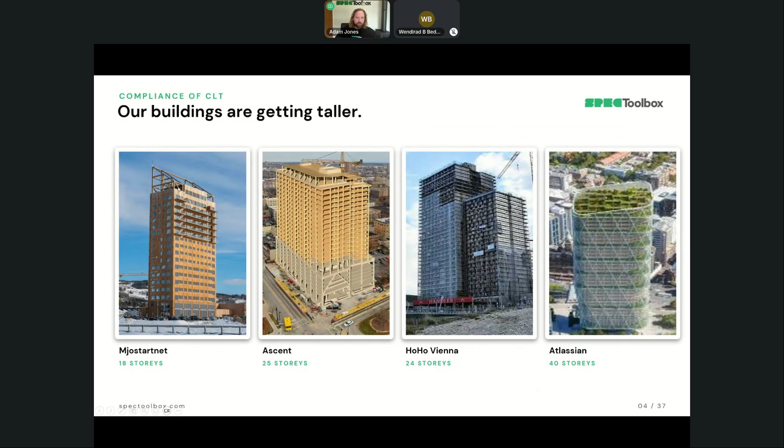But intuitively, we know that fire and timber burn. So it's the question mark that everyone probably watching Atlassian Tower goes up, why are we putting logs that I'd put on a fire into a building, basically? But questions well asked, but also well answered.

But there's something else that happened a little while ago, and this has got nothing to do with timber, but it did spook everyone when it comes down to combustible materials and compliance. So Grenfell, it's a famous building that went up in smoke. 72 people died. The issue here was combustible cladding, not timber, and also no fire sprinklers. So without sprinklers, there's nothing to suppress the fire as well. So a lot of these things are adjacent to the timber solution and the things that actually stop the fire.

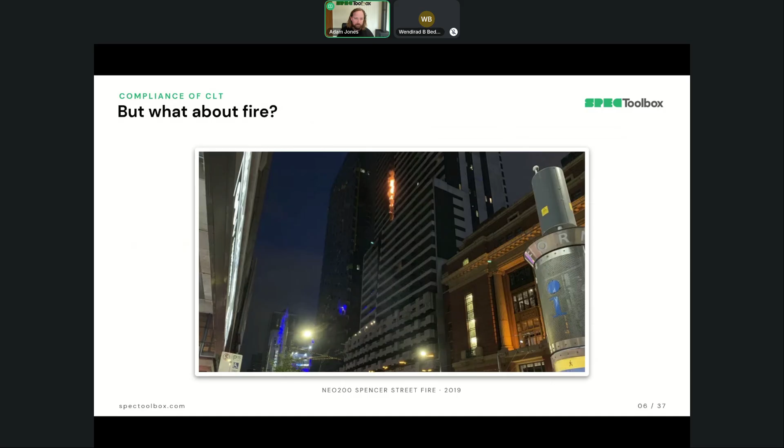And going ahead, a bit closer to home, we also had Spencer Street fire. So again, combustible cladding was an issue, and we got everyone a little bit spooked. And it's one of those things when there's a lot of uncertainty involved and you don't know the topic very well, naturally you go towards risk aversion. And I think timber got the brunt of that, particularly in the UK where the market got hurt.

So understanding compliance is really critical here and knowing how to navigate things. And the first thing when it comes to compliance, this is the same across all codes essentially: what are the goals that you're trying to achieve and the functional objectives? And then how are the performance requirements achieved? Then underneath that, as I'll take you through, there's multiple pathways to achieve it. So firstly, it's life safety, firefighting, prevention or intervention. They're the key things, but then also business interruption and controlling property loss and the amount of costs as well, to make sure that buildings can get insured at the end of the day.

So when it comes to timber buildings, there was great work put together by Forest Wood Products Australia and individually Boris Iskra. He did a lot towards this essentially and really took the industry forward to give us confidence on this. And what it meant was there was a clause entered in the building code that you can use - so even if the building code says it needs to be non-combustible, you can still use fire-protected timber, meaning you're allowed to use timber even though it's a combustible product essentially, as long as the building's not 25 meters in height, which is about 8 stories.

You've got a sprinkler system, and the research shows that sprinklers pretty much do a lot of the heavy lifting. There's research in Canada to show that it doesn't matter what material the building is - if you've got sprinklers, you're pretty much totally fine. But also it needs to be non-combustible as well, and then cavity barriers and things like this. So great, it's in the building code.

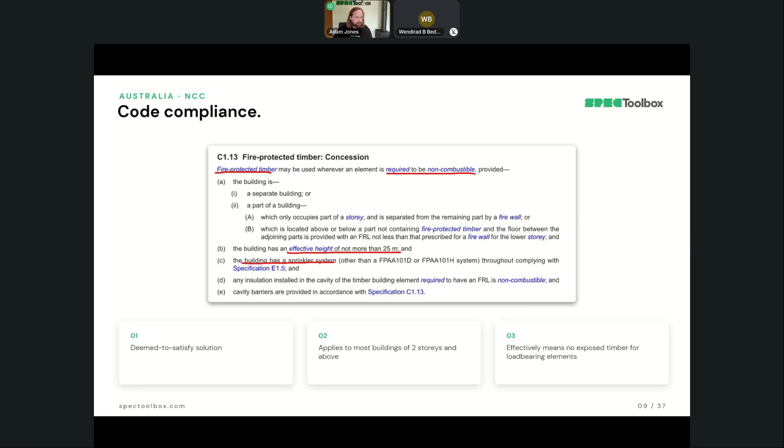So a closer look at the building code - there's essentially performance requirements. So what are the objectives that you're trying to achieve? And then there's 2 compliance pathway solutions. So one essentially is the performance solution and the other is the DTS.

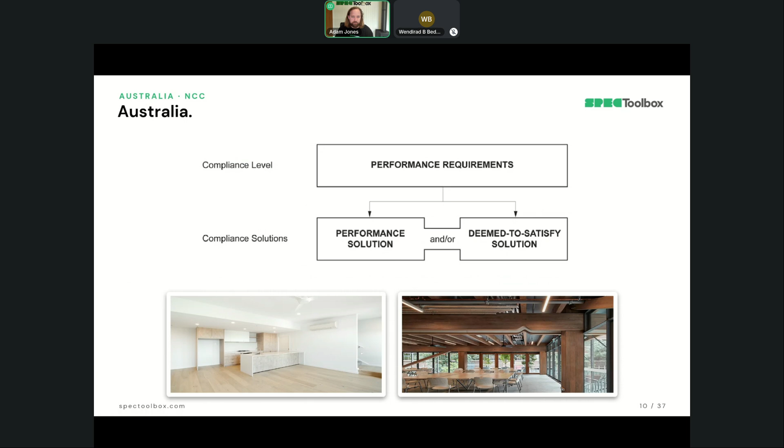So the deemed to satisfy is a bit much like getting a cookbook, going into Marley Spoon, following a recipe. If you follow that, you're going to have a beautiful dinner because a chef has put it together. And if you follow their steps, you're great. But the other one is you can hire your own chef to cook the meal as well. And that's essentially a performance solution - achieving the objectives of a nice, tasty, nutritious meal at the end of the day. So that's essentially one way of looking at it.

So if you look at the overall functional objectives, these are the performance requirements in the building code. You've essentially got these provisions here that at the end of the day is all about fire resistance and stability, compartmentalization and openings and protections. This is where it says, I don't care how you achieve it, as long as these things are met. And then underneath that, you've got the DTS or the performance solution as well.

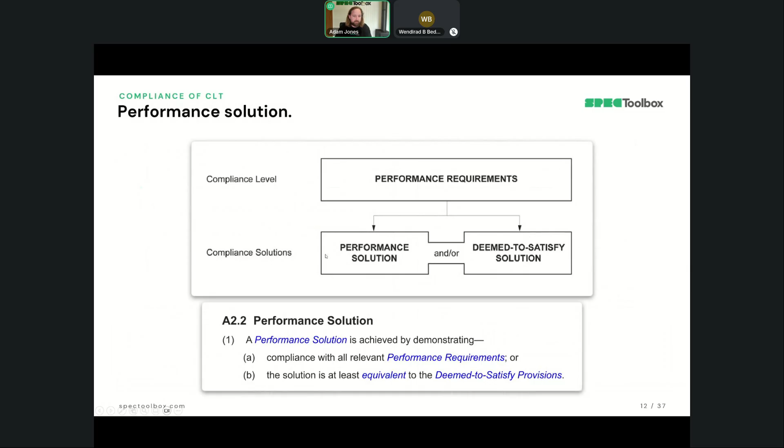The performance solution is a pathway to achieve these performance requirements. A lot of today we're going to be focusing on the DTS from an FRL perspective, but sometimes it's unavoidable when you go to exposed timber - the performance solution from structural fire design becomes critical.

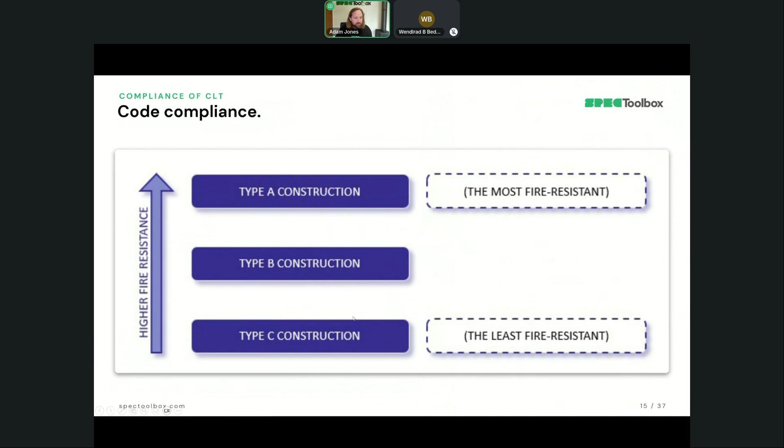So a few questions: can I expose the timber, and what is the FRL of the mass timber product? Before we get into that, it's good to know the different classes or types of buildings. As you require higher fire resistance and building risk increases - whether it's the height of the building or the building type - you need type A construction, which determines whether you can expose it and what the FRL is. Through to type C construction, which is pretty much like a residential building, very low risk - expose your timber, no problem, she'll be sweet.

When it comes to an FRL, there's a few different things - these lines denoted by FRL. Firstly you've got structural performance, integrity, and insulation. Adequacy is structural performance - one of the objectives required for the building code - does it stand to meet the amount of time required? Integrity is whether you're actually passing through fire and hot gases. And third is insulation - is it heating up beyond what's satisfactory?

If you look at the different building elements, it's pretty self-explanatory that a column, you only care about adequacy - you're not separating anything. But if you go load-bearing wall, it's adequacy, integrity, and insulation.

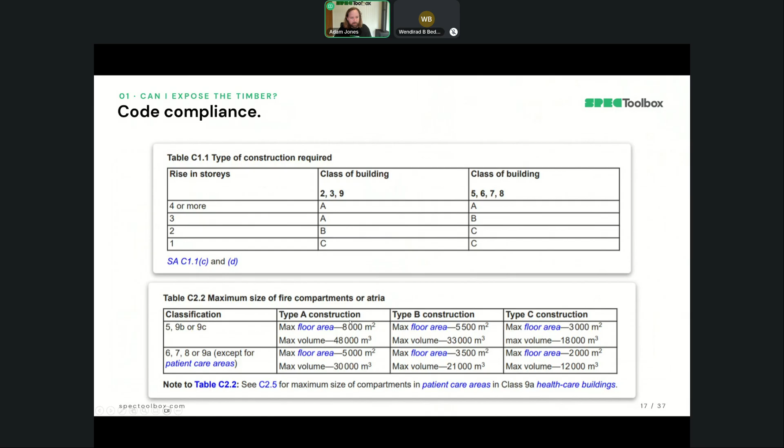In the building code there's different classes of buildings, essentially by the class - could be class 5 office buildings, or 2 or 3 which is residential. I'm a bit rusty on my memory there, or the maximum size of buildings as well. So if you've got a tiny industrial building, no problem. A big industrial building, you need type A construction.

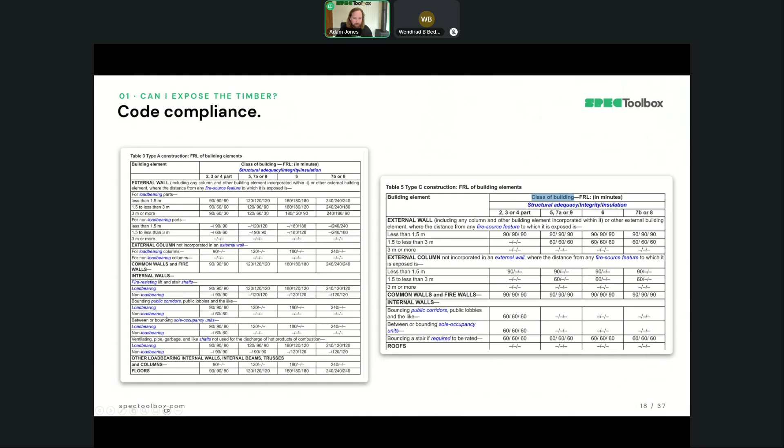Once you know the type of building, you can actually look at the individual elements - external walls, columns, whatever it might be - to determine what the FRL of the individual element is. Then the next question: can I expose the timber?

The building code says in a building that is type A or B, where it needs to be non-combustible, you actually need it designated non-combustible. I'm not going into detail right now, but it's essentially plasterboard or other products that can be classified equivalent by an accredited testing laboratory. But essentially it says external walls, common walls, and load bearing internal walls need to be non-combustible - that's where it delineates that. It says no matter what, you need to be non-combustible.

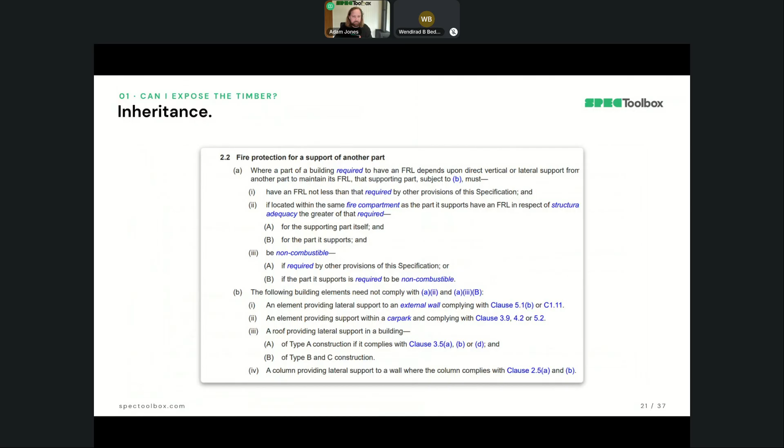But what about floors and everything like that? That's actually not covered in C1.9, but it is here. It says anything that touches those external walls is deemed inherent, and it needs to inherit the same FRL. That's essentially where a lot of the building elements end up needing an FRL. But if you go through the letter of the code, it's pretty funny.

Now, what I'm going to tell you now, I don't think it is the intent of the building code, but if you look at a building like this, 25 King Street, part of you might say, yep, of course it's a performance solution - everything needs to be covered up in plasterboard to be DTS. But if you actually follow it, there's a funny loophole here where this could be a DTS building. Again, don't quote me on this and sue me or anything like that.

Essentially, as it says in the building code, external walls need to be non-combustible. There's no external walls here. Then it says all the floors inherit that as well, essentially. So class C, it's not this building. Class A and B, there's no load-bearing internal walls either, but the external wall needs an FRL as well. So if the external wall needed an FRL, the rest of the building inherits that.

But then it also says that if you get wall wetting sprinklers, you don't need that to be non-combustible. So that eliminates the external wall, then anything that inherits that - all of a sudden you've got a fully exposed DTS building. Probably won't fly because it's not the intent of the building code.

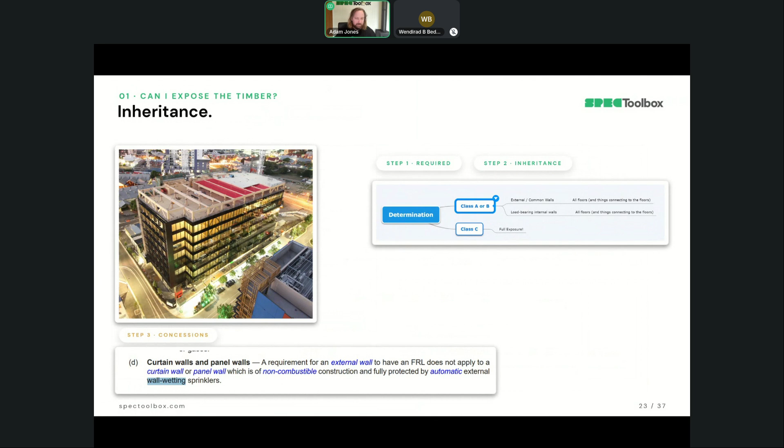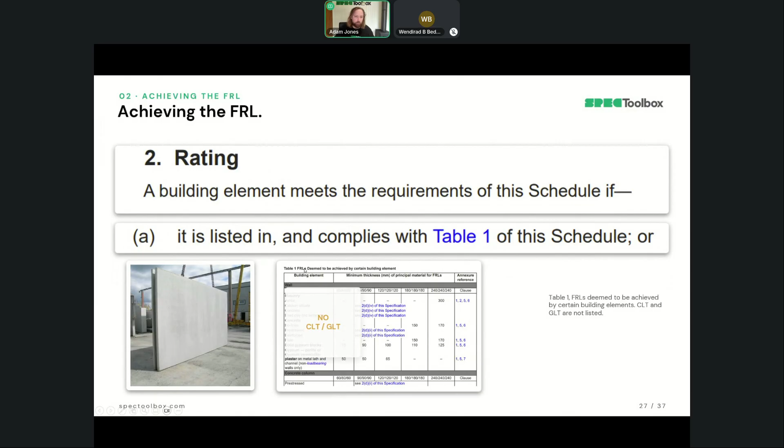But again, it's worth knowing how it all works. The second question is how do you achieve the FRL? This is where you go to Schedule 5 in the building code. There are different pathways. One pathway is essentially Table 1.

It tells you that concrete of certain thicknesses can meet the FRL. There's no CLT or glue lam there. Secondly, if you could do a standard fire test by an accredited testing laboratory, like a NATA accredited lab, essentially Jensen Hughes or CSIRO, anything like that, and they say it achieves the FRL based on a fire test, then you're sweet.

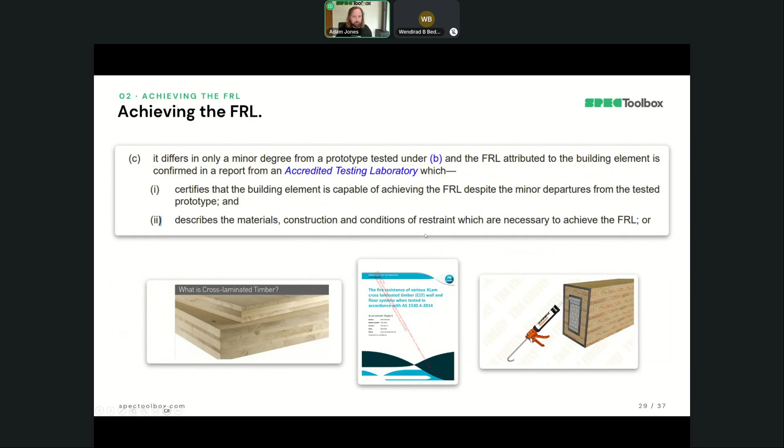C, another one is if it's a minor deviation, but basically the accredited lab is making that call, and it's all sweet. Then D, in AS1720 Part 4, if it's listed in here, you can achieve the FRL. That means things like glue lam, as long as it achieves this manufacturing grade, then you're totally fine. But also structural adhesives.

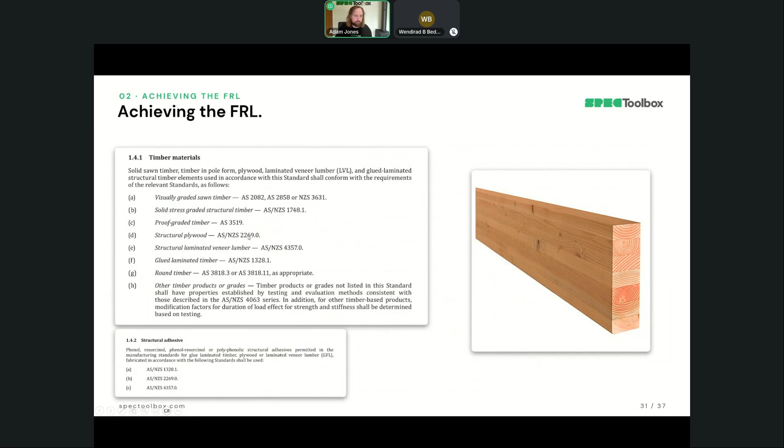You've got to check if the supplier's got certification of whatever the adhesive is. But if that's the case, then you can follow char rate provisions in AS1720 Part 4, and then you actually meet the FRL.

E, standard fire test confirmed in a report as well. This is sort of where it explodes and opens up, and there's a lot more interpretation here, essentially where you don't need the lab, but you need suitable evidence to do the job.

So if you look at different things, you can imagine you've got a CLT slab, AS1530 Part 4 test to get a DTS. The CLT suppliers now give you char rates to do that, and there's good reason for it. CLT penetration to services, AS1530 Part 4.

For the beam, you might get AS1720 Part 4, and same with the column as well. Then the joints and connections, you also need some testing of the product as well, or equivalent, to make sure you're achieving that. So with that said, that's a little bit about CLT fire design and broader fire design and compliance.

And with that said, now Wendrad, my friend, I'm going to pass over to you. And then at the end, we'll take some questions.

Thank you, Adam, for passing it over.

Okay, so hi everyone, thank you for joining. My name is Wendrad Bedane. I'm a structural engineer at SPEC Toolbox, Addis Ababa. Today we'll talk about CLT fire design using the new Eurocode 5, and I will show you how to use SPEC Toolbox to do this calculation in a live demonstration.

In today's session we'll cover four things: fire mechanics, where we see how fire actually works; then timber in fire, where we'll see how timber performs when exposed to fire; third, we'll cover the latest Eurocode 5 updates; and finally, we're going to have a live app demonstration for a selected project.

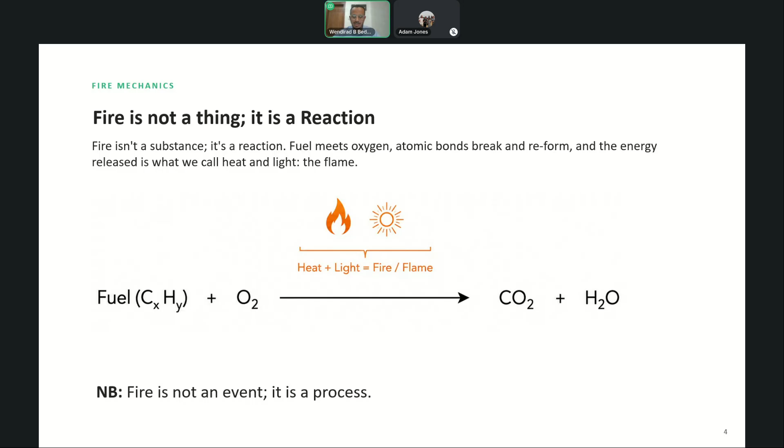One thing we need to take into consideration is fire is not an event, it's more of a process. So in the next slides, we will see the major phases of the fire development process.

So the first stage of the fire development process is the incipient stage. Here we don't see any flame, it's more or less a smoldering combustion reaction, and the temperature ranges between 0 to 200 degrees centigrade. With enough supply of fuel, we will proceed to the next fire growth stage, which we call the growth stage.

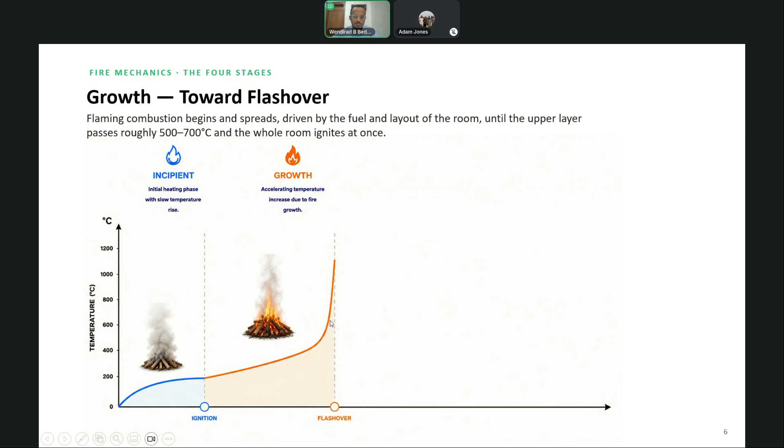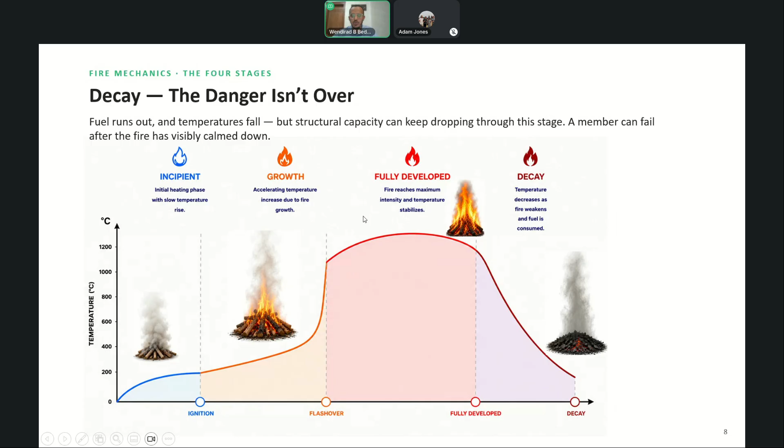Here temperature decreases and the fire weakens, and finally the fuel is consumed, and this stage is controlled by the fuel supply. These are the major fire development stages that we need to consider while designing members for fire. The other thing we need to discuss under fire mechanics is the fire severity.

This is a measure of how destructive a fire is to the structure. It's measured in terms of the fire's duration, and compared with the fire resistance. So whether our structure sustains this fire or not will depend on the comparison of the fire severity with the resistance provided, and we decide whether the structure passes the verification or not.

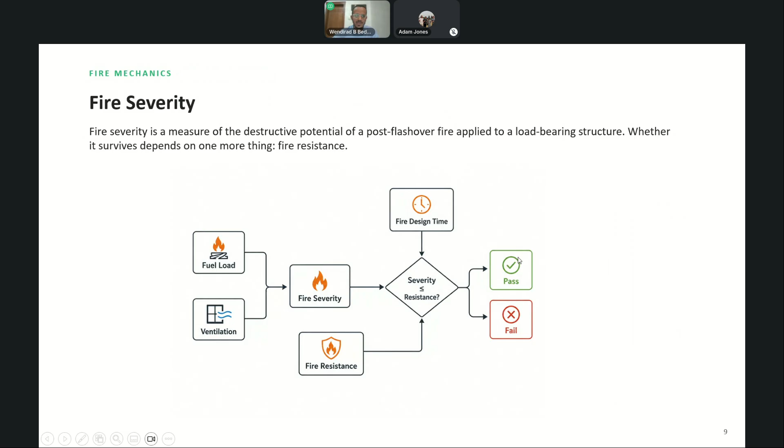So now it's all about timber in fire. In this section, we'll see that timber is a fuel and at the same time the structure itself. Unlike steel and concrete, where we don't see burning of the structure, timber is genuinely burned. It's part of the fire that we need to protect, and at the same time it is a fuel that contributes to the fire development. So this is critical while designing structures to fire, particularly made of timber material.

At a micro level, we see the following chemical reactions on timber. When the temperature ranges between 0 to 100 degrees centigrade, we'll see a drying reaction where moisture leaves from the timber and the timber starts to dry and gets intact. Then around 150 degrees centigrade, there is initial decomposition. Here, irreversible reaction starts. Then we go to the pyrolysis reaction.

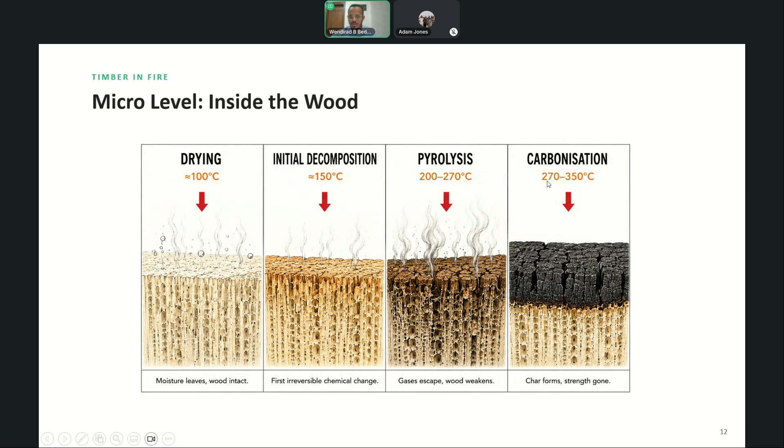Here, gases start to escape. At this stage, the strength and the stiffness are highly compromised. And finally we will end up with the charred or carbonisation chemical reaction between 270 to 350 degrees centigrade. Here, all the strength and the stiffness are gone.

At a macro level, timber can be classified into three different layers. One is the char layer between 500 to 700 degrees centigrade. Then comes the pyrolysis zone, which is the heat affected zone, but the timber is not yet charred. And the other is the unburned wood. Anything below an average of 200 degrees centigrade, full strength and stiffness are retained.

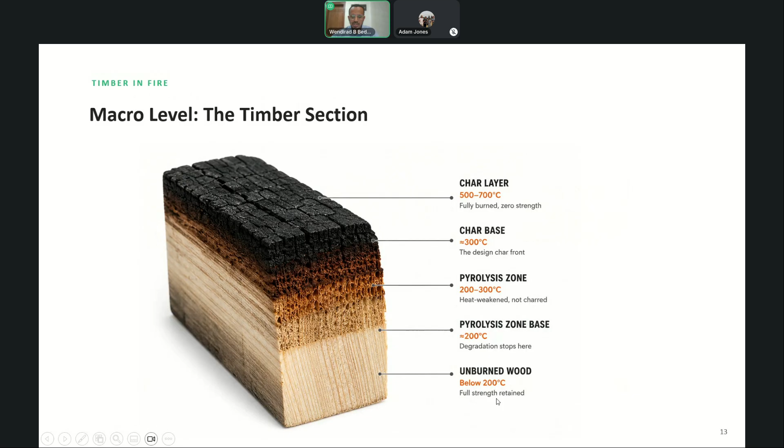The key and critical parameter we need to consider while designing timber members for fire is the charring rate. This parameter measures how the fire chars the timber, so it's more or less the rate of charring. This parameter depends on the species and density of the timber. Denser and heavier species will char slower, higher moisture content will slow the charring rate, and corners will char faster than the normal flat soffit of the timber member.

Generally, we will follow the following charring rates for softwood. It's 0.65 millimeter per minute, and we will have different charring rates for different species of woods.

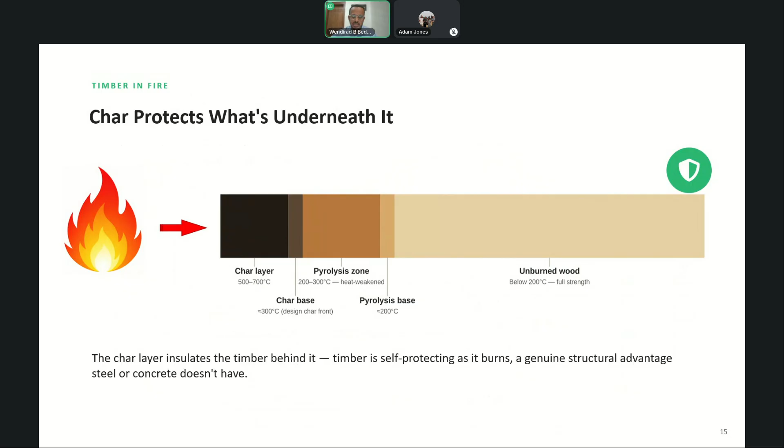This is the most interesting part while we discuss the charring of timber. The charred layer starts to insulate the unburned section when it is exposed to fire. So this self-insulating property of the timber needs to be considered in our design. This advantage we don't get from conventional steel and concrete buildings. So while we design for timber in fire, we need to consider the self-insulating effect on our design.

The other thing we need to consider while designing CLT is the glue line integrity. CLT is not solid wood, it's more layered together by glue. There are different adhesive types used to glue each lamella. One is the fire resistance adhesive type, where the adhesive or bonding agent is good enough to resist the fire, and it will stick all the lamellas together even after burning, whereas the thermoplastic adhesive types will fail to hold each layer when exposed to fire.

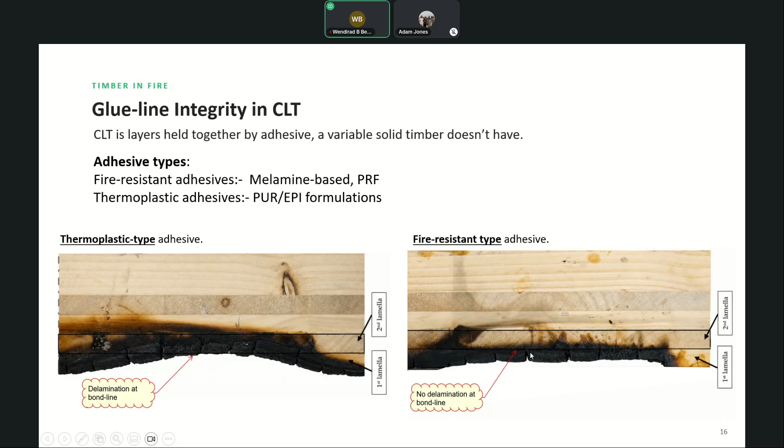As you can see on the screen, the left side is the thermoplastic type, and when it reaches around the glue line or bond line, it starts to delaminate or fall off from the unburned section. Here, since the fire adhesive type is fire resistant, it starts to stick to what is below or what's already charred.

Then we'll come to the heat affected zone. As you know, when timber is exposed to fire, the strength and stiffness are compromised. Obviously the charred part has no stiffness and strength, but the heat affected zone is the section where we have reduced strength and stiffness. For the uncharred section, we consider the strength and stiffness fully retained. So this we need to consider while we design our structure.

Now we will go to section 3, where we design timber for fire using the latest Eurocode 5. As discussed by Adam on the design goals, the latest Eurocode provides three approaches to make sure our timber structure is safe during fire design situations: the acceptable solution, the approved calculation method, and the performance-based alternative design solution. We'll see this in detail, as covered in the latest Eurocode 5 under chapters 6, 7, and 8 respectively.

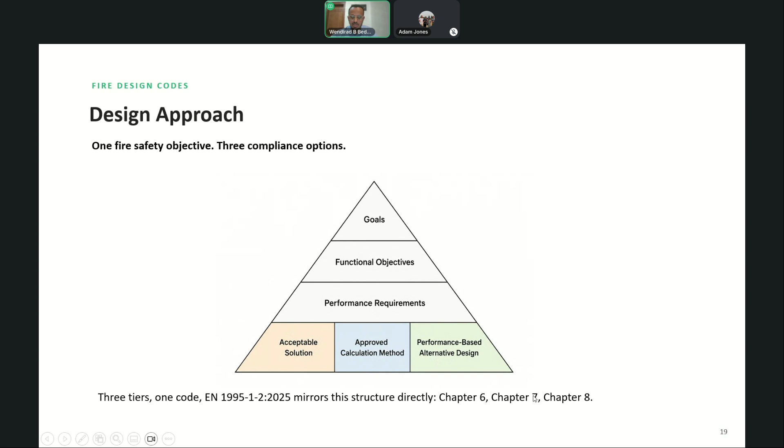The first solution is the acceptable solution. Here we don't do any detailed calculation, everything is already provided by the code. We want to make sure our standard simply fits what is listed on the tabular data of the code, and no engineering judgment is required. No charring calculation needs to be done. So this is the fastest path when we need to comply with the fire design code. If your building matches, you can use the table provided under chapter 6 for tabulated design data.

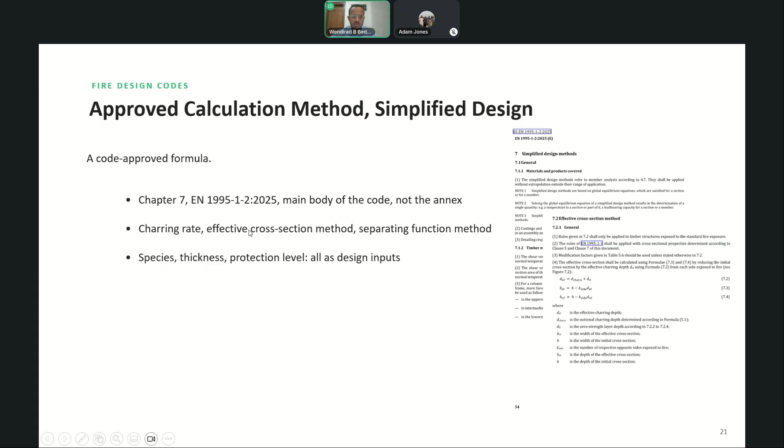The next solution is the approved calculation method. Here we use approved calculation formulas, so there are detailed calculation methods. This is the main body of the code, not provided in the annex. You'll see the charring rates, different fire design methods including the effective cross-section method and the separating function method. We'll also cover how the timber species, thickness, and protection level affect the design process. Our calculator, SPEC Toolbox, operates on this method for the moment.

The other design solution is the performance-based design solution. Here, the fire engineer starts to develop advanced calculations based on the first principles of the design goals. Thermal and mechanical modeling is required, and you can do it with finite element analysis. The detailed provision is presented in the annex section of the latest Eurocode, and most importantly, this requires a fire specialist to do the performance-based design approach.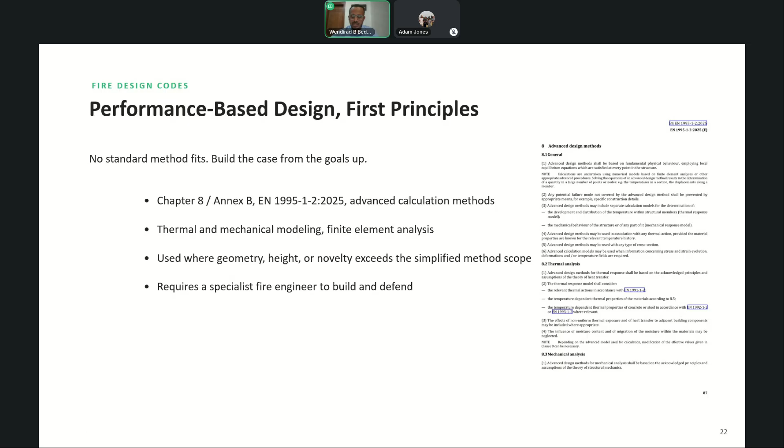Now we will see the components of fire resistance. This is more or less similar across all standards and codes. There are three fire compliance or resistance requirements. The first is structural adequacy. Here we make sure that the load-bearing capacity is retained during the fire exposure time, measured in fire exposure time. R stands for the fire resistance level of structural adequacy. The standard fire exposure times are 30, 60, 90, and 120 minutes. So we will make sure that the structure will not collapse during these fire exposure times.

The next is integrity. Here we only make sure that the passage of hot flames and smoke to the unexposed side is prevented, so that it is convenient for the user to use the fire unexposed side during fire attacks. This is also measured in time, including 30, 60, and 90 minutes for the standard fire exposure.

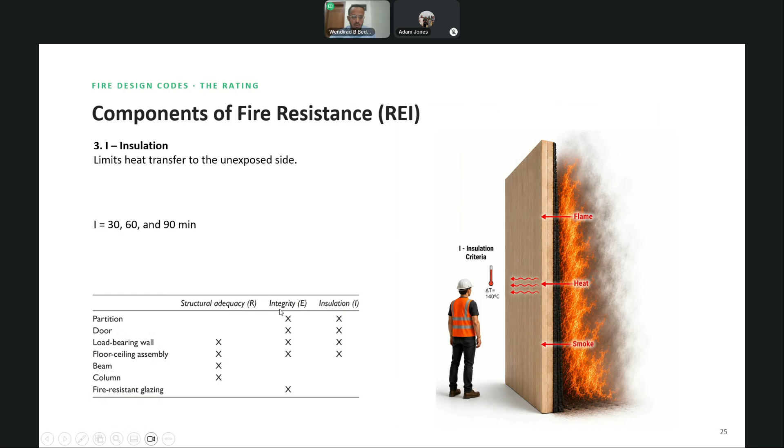The other fire resistance component is insulation. Here we limit the temperature on the unexposed side, so the user feels comfortable when using the unexposed side of that structure. This is also measured with time duration. We will see this in detail in our calculation. These are the typical requirements: load-bearing wall and floor assemblies are expected to satisfy all the compliance requirements of structural adequacy, integrity, and insulation, whereas partition doors and glazings might require only one or two of the requirements for fire resistance.

In the latest code, two charring rates are provided. The basic charring rate is a fixed number, depending only on the species type of the wood. The notional charring rate is the factored charring rate based on different factors, including the gap factor at a joint and the protection factor, depending on the provided protection type. These are the typical charring rates according to the code, so we will pick what fits for our selected timber species.

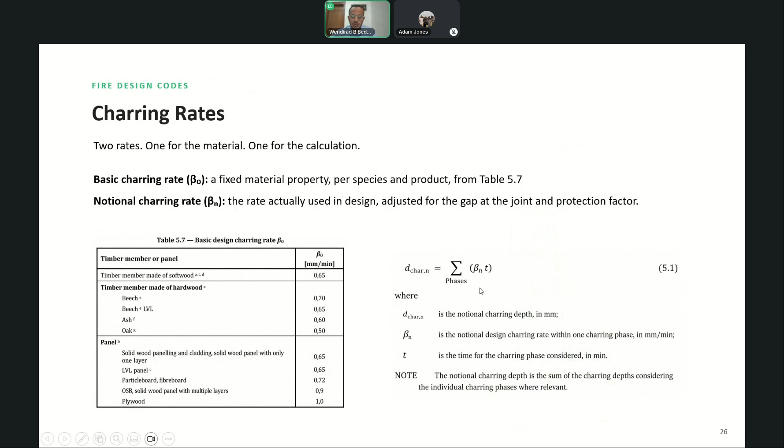Then we will calculate the char depths for different phases using the following formula. We'll see the detailed phases that we need to follow while using the latest Eurocode charring model.

So there are different phases, including phase 1, 2, 3, 4. The charring rates can be calculated with the following formula. Beta naught is the basic charring rate, Kg is the gap factor, and K2 is the protection factor. Depending on the phase, the formula will vary as shown here. This typically applies for plane members, including CLT ceilings and CLT floors.

In our calculation, then comes the charring phases for the European char model. On the latest code, the char model classifies the charring framework into two major classes: one is when the timber is initially unprotected, and the other is when the timber is initially protected. When initially unprotected, the charring rate follows phase 1, where we don't have protection.

For the initially protected cases, we have four charring phases, including the encapsulated phase. Here, no charring occurs at this stage, so phase 0 is denoted with no charring. Phase 2 is protected charring, where we see charring of the timber behind the protection - the protection has not failed, but charring has already started. Then comes post-protected charring.

This is the charring stage when the protection system fails, and the charring starts to speed up with a faster rate. Then comes the consolidated charring phase. This typically applies for a thickness that extends above 25 millimeters, where the charring rate will start to slow down - this is the self-insulating behavior of timber we discussed.

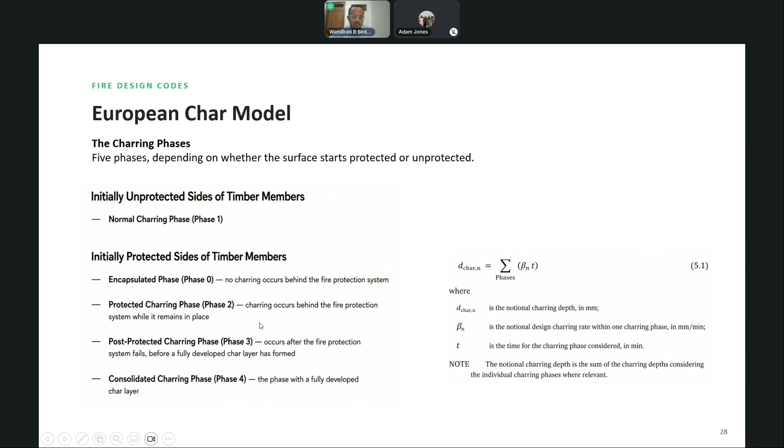These are the major times that we need to consider in our charring calculation. The first is the starting time of charring, which denotes where charring begins. If you have protection, the starting time of charring will be delayed, and we calculate it with the following formula depending on the protection type used for the floor or wall buildup.

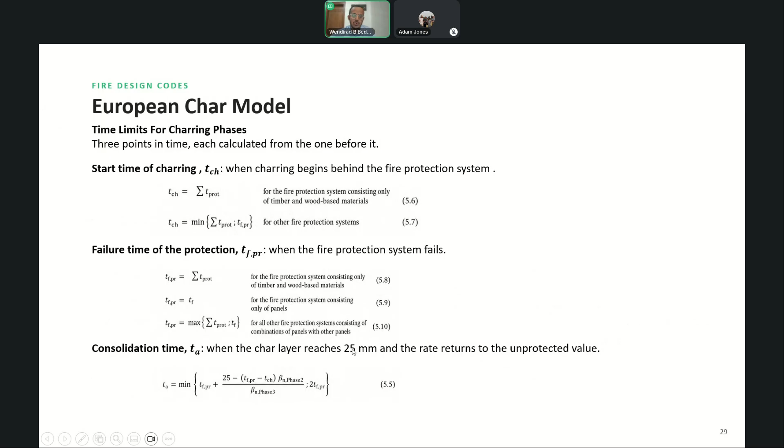The other is the failure time of the protection. Sometimes charring starts behind the protection before the protection fails, so we need to calculate at what time the protection will fail, and also the consolidation time. This corresponds to the charred depth of 25 millimeters, so we calculate at what time the charring depth reaches 25 millimeters. These are the critical times we need to consider when calculating for timber in fire.

The other is the zero strength layer. This is a critical one. As timber is exposed to fire, a portion of the timber will not be fully charred, but it is affected by the heat. So we need to deduct from the uncharred thickness, and this thickness is dependent on the char line, or where the fire stops.

If it is the first layer, we use this row, and if it is on the other layers, we use the second one. It also depends on whether this is for the floor, whether it is the tension or compression side of the floor, and whether it is initially protected or not. So we will follow this table for the floor. Likewise, for the wall member, we will follow the following zero strength calculation formulas. These are totally new, as compared with the current Eurocode 5 for fire design.

So the following four slides will show us how timber chars based on the European model. Depending on whether the bond line holds the charred layer or not, we have a different framework. This is for when bond line integrity is maintained. If the member is initially not protected, we will use the charring model shown on the left side.

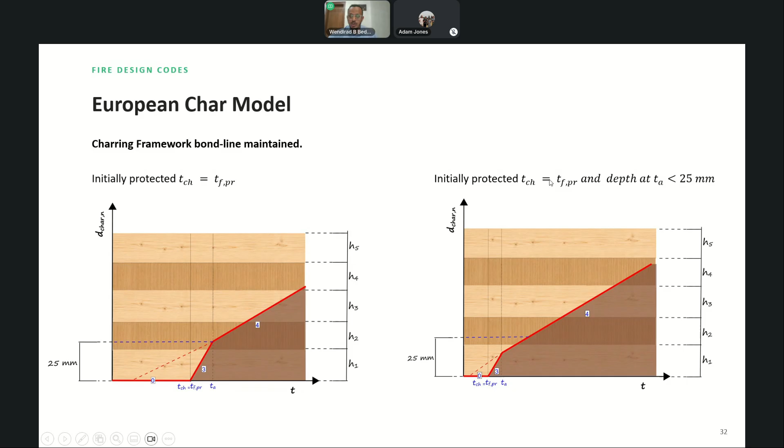If the starting time of charring and the failure time of the protection are also equal, and also the depth at the consolidation time is less than 25 millimeters, we use this plot for our calculation. The same applies when the glue line is not maintained - that means if the bond adhesive will not support a higher temperature, we will follow the following detailed framework.

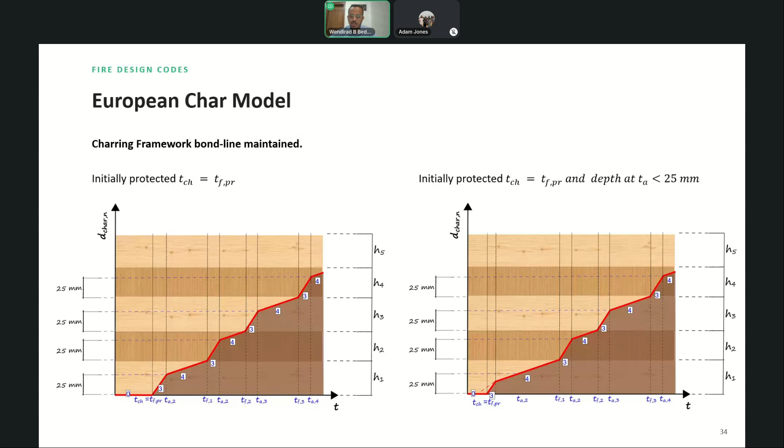This is for initially unprotected, and this is for initially protected, but where the starting time of charring and the failure protection times are not equal. The same is true for initially protected cases where timber charring time and failure protection time are equal, and when the consolidation time is at a depth less than 25 millimeters. So we need to strictly follow these charring frameworks while using the European char model to calculate the char depths.

Now we will see a little about the design method provided in the latest code. In the simplified design method, we calculate the remaining unburned thickness of the timber using the following formula. D effective calculates the effective charred depth, and H effective is the unburned or remaining section after the fire.

This plot and dimension applies for one-dimensional charring, used when designing a plane member including floor and wall. This other one applies for two-dimensional charring, used when designing timber beams and columns for fire structure design.

The other is the separating function method. Under this method, we check that the integrity and insulation criteria are met, since fire can have different heat flow paths. The red dotted line shows the different fire or heat paths. We calculate each and select the critical one, and for our design we use the envelope of all possible heat flux paths.

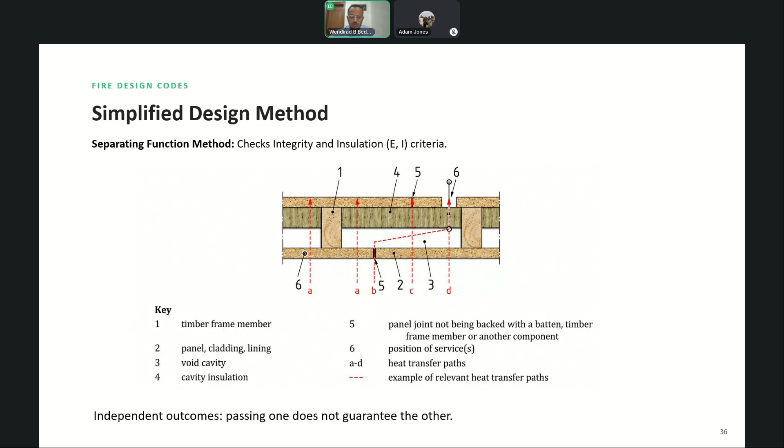This is critical when we select our floor build-up or wall build-up for fire design using the latest Eurocode 5. The other topic we need to discuss is the protection time.

Here we calculate the individual layer protection on our build-up. To calculate this, we need to account for the following parameters. First is the basic protection time - the code provides generic formulas for the default protection types. There are also exposure factors for the exposed side, and an unexposed side factor, which will affect or factor the basic protection time.

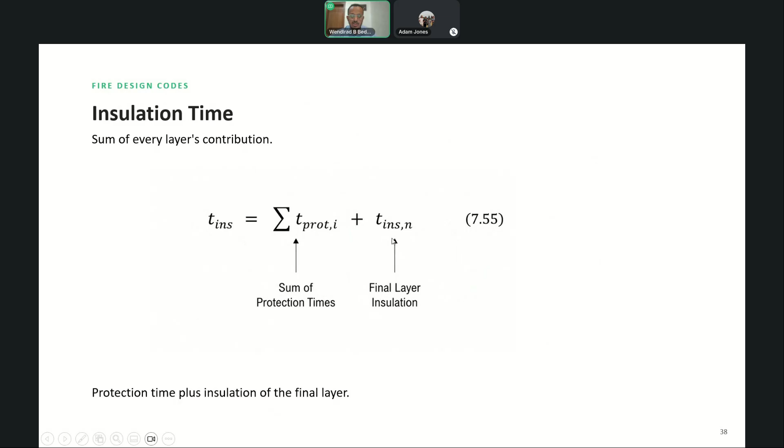Then we have a correction time, or additional time, and also the joint factor that we need to consider. With all this formula and calculation, we decide the protection time of a single layer on our floor or wall build-up. Likewise, for the insulation time calculation, we use the sum of the individual protection times plus the final layer insulation time.

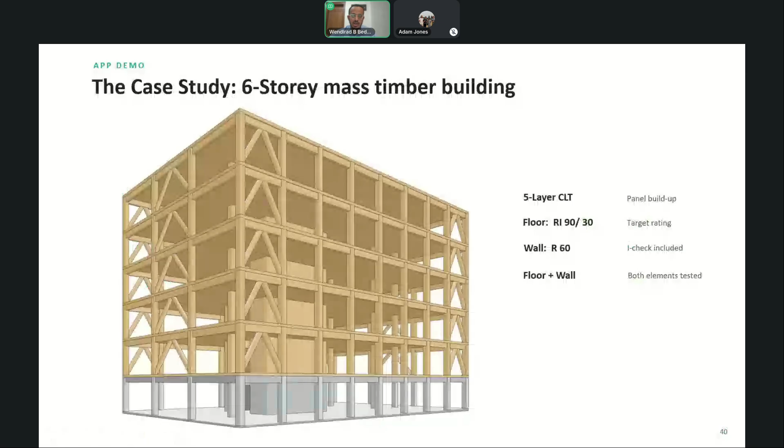With this, now we will proceed to the app demo. Before that, I will brief you on the project. This is a 6-story mass timber building that we will use for our design. It's located in Brisbane, Queensland.

We will use the design standard AS 1720.4. For the structural system, it considers the CLT floor, CLT wall, CLT beam, GLT beam and GLT braces, and also GLT columns. For the fire design, we will use the simplified design method, following the SPEC Toolbox calculator.

This is the typical floor of this building. We'll have a load spanning in the X direction, or the lateral direction. The support is the beams, and around the core, the support will be the wall marked by the red color fill.

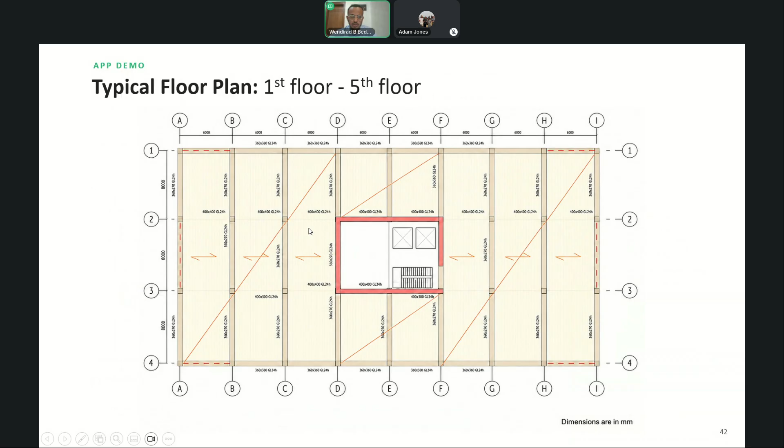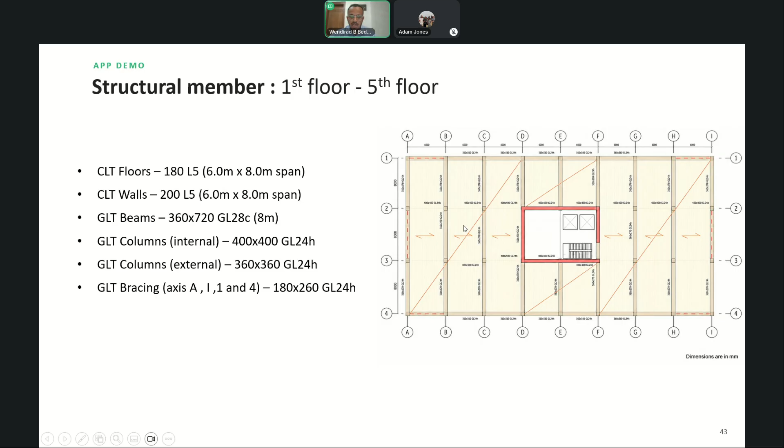So we will design a selected member. For the structural system, our floor is 180 millimeter thickness, 6 meter by 8 meter span. The same for the wall, and the GLT beams are with the following dimensions, and we have bracing at axis A, I, and at axis 1 and 4.

With this, we'll start to calculate the loading on the floor. We selected a one strip span for the analysis, and as you can see highlighted here, a 1 meter strip width is used. The selected CLT type is CLT KLH with 5 layers and 180 millimeter thickness.

The superimposed dead load is 2.75 kilonewton per meter square, and the live load is 3 kilonewton per meter square. For this section, we will try to verify the structural adequacy, or load bearing resistance, for 90-minute fire exposure, and insulation for 30-minute fire exposure.

So we have two options for the floor, first floor up to fifth floor build-up. The first build-up has 5-layer CLT followed by wood fiber insulation and a gypsum plaster board of 30 millimeter thickness, with the wood fiber at 50 millimeter. The second option is protected from underside with 2 layers of gypsum plaster board, still with a 50 millimeter wood fiber insulation between the CLT and the gypsum.

So the first option is economical - we will see whether it satisfies our design - and the second option is an enhanced protection system. Now let's proceed to the SPEC Toolbox app.

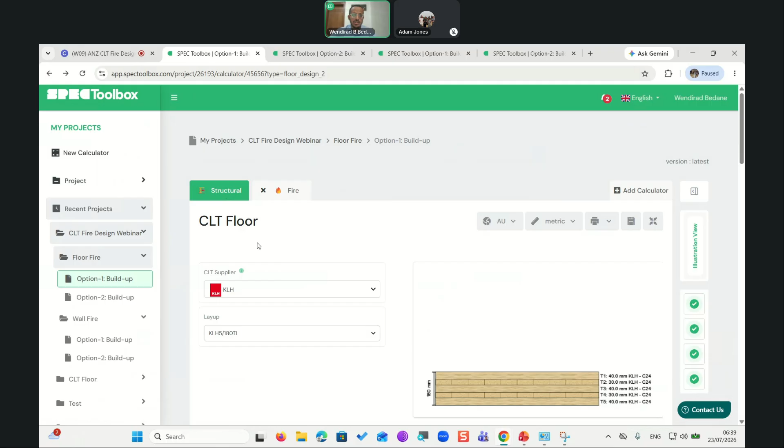I have already built the calculator, so we can follow along to save time.

The first thing we need to define is the region, so I set the region to Australia. We will define the build-up: the supplier is KLH with a 5-layer, 180 millimeter thick CLT floor. Then we set the design code and the analytical method, which is the extended gamma method. If you'd like detailed information, click this blue button.

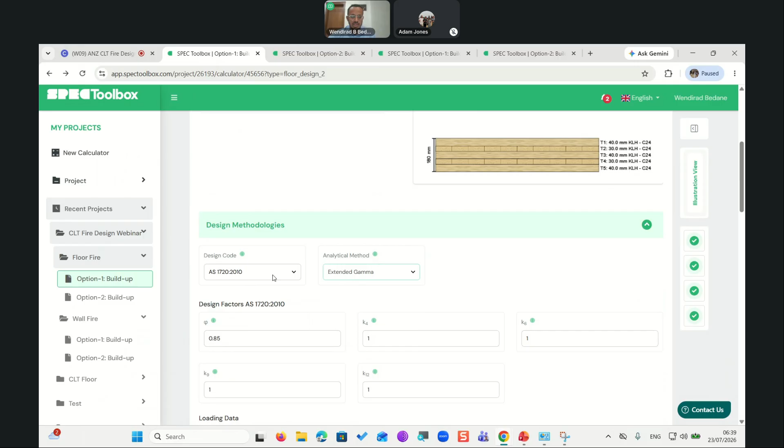You can have detailed information about the input you are going to define. Here we have the design factor for the Australian code.

Then comes the loading data. We want to calculate the loading combination using the default load combination as per the following loading code, and we will set all live load factors and also the creep factor.

This is important because we need to define all necessary input for the ambient section before we proceed to the fire calculator. Then comes the analysis section.

As we have seen in the presentation, it's a 3-span with 6 meters each, and the assigned load includes a live load of 3 kilonewton per meter square, which we define here. The dead load is 2.75 kilonewton - this is superimposed dead load, and the calculator will do the self-weight calculation automatically.

So we set it to yes. If you don't want to include the self-weight calculation, you can set this to no.

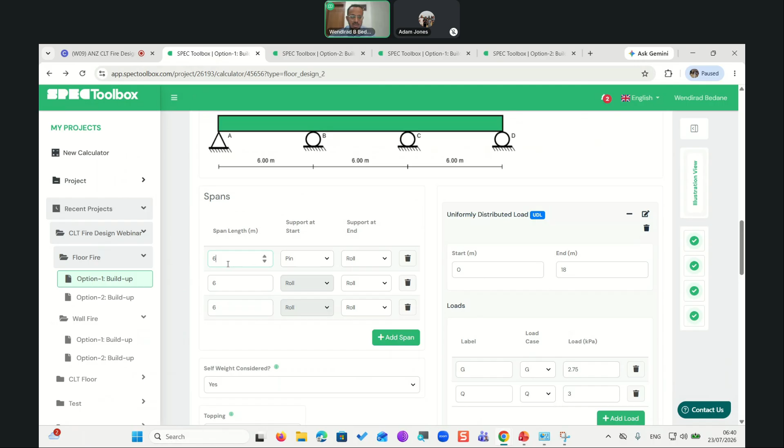Here is how we define the span - we have 6 meters for each, and also the support condition. So this will be our system.

Now we will define the deflection data. So the deflection limit or criteria can be defined here, and also the vibration data or input data for the vibration analysis method is defined here as well.

For the moment, I have selected the FP Innovations method with a vibration improvement of 20% increment.

So on the output section, you will see the output summary first. This is how each and every major verification is checked - deflection, vibration, shear, and bending are all passing for the ambient case.

Now we directly proceed to the fire input data because today's session focuses mainly on the fire data. By default, when you open a CLT floor or wall, you have this new tab, or you can also add the calculator here. So the fire tab will present like this.

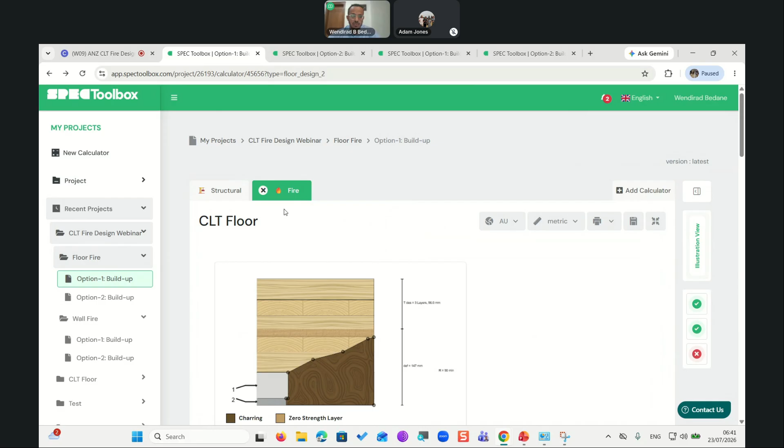This is our end result on the fire charring. Let's see the design inputs for the fire char before that.

So the fire method, as discussed earlier, will be the latest Eurocode 5. We also have different methods, including the standard test and the current Eurocode as per the Austrian National Annex, but for this example we will focus on the latest Eurocode.

For the performance check, we will see the load bearing and insulation. For the moment, integrity is not included, but load bearing and insulation are already implemented in the calculator.

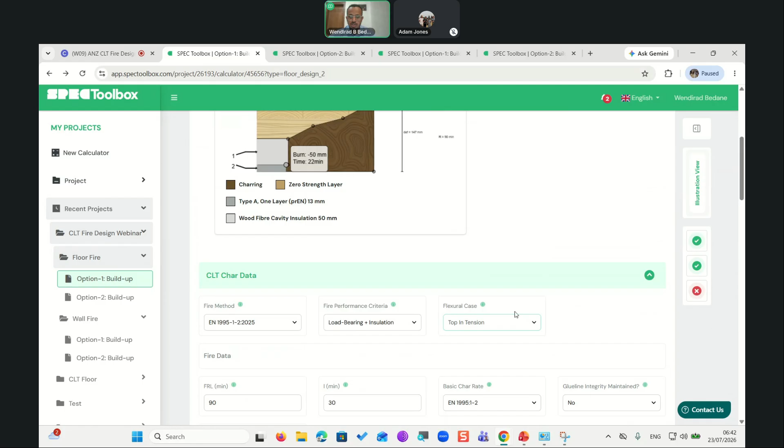This is all about how the dynamic plot displays. So if you want to see what remains on the section in flexure - the tension side and the topping compression - this entirely controls the display. It doesn't affect your calculation.

Then comes the fire data. So we set the load bearing fire exposure time to 90 minutes, the insulation time to 30 minutes, and the charring rate can be taken from the latest Eurocode.

The supplier of the CLT can provide this charring rate, or we can do a manual input, but for the moment we stick with the latest Eurocode.

Here we decide whether the glue line is maintained or not. For the first case, we set the glue line integrity as not maintained, and the fire is exposed from the underside. Since the fire duration is a little longer, we need to provide protection.

Before that, we define the factors that account for the protection of the CLT. This comes from test data, so we set it here at 0.7. We don't have a joint at the location we are studying, but if you have a joint, you can define different joint types for the CLT and also for the protection system.

Here we will start to define the protection from the underside. If you set this, the timber section will not be protected, but if you click here, you will provide protection from the fire exposed side. So now fire is exposed on the underside.

These are already defined. So we have a wood fiber cavity insulation with 50 millimeter thickness, and the protection factor K2. This is taken from the test data, and we don't have a joint at that specific heat flow path as we have seen on the separation function.

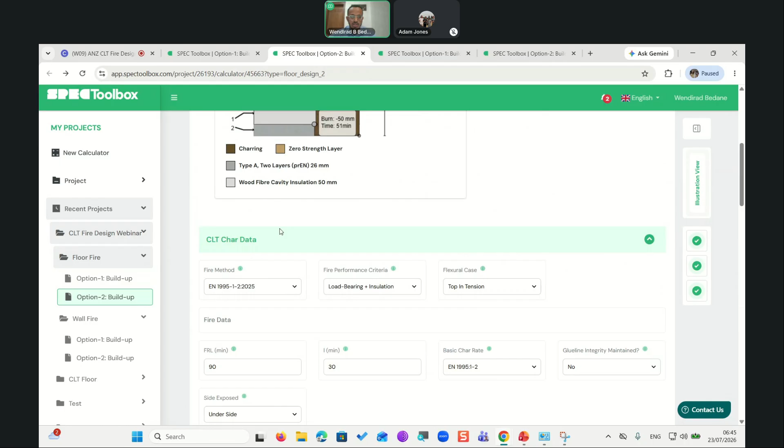Now we go to option 2 build up. As you recall, the only thing that we change here to make the system efficient is we set the gypsum plasterboard to 2 layers. Previously it is 1 layer, so we have equal thickness for these 2 layers. As you can see, the dynamic plot thickness also changed for the timber section. So the strength is verified, and also the insulation requirement is verified. All checks are passing because our gypsum layer is 2 layer.

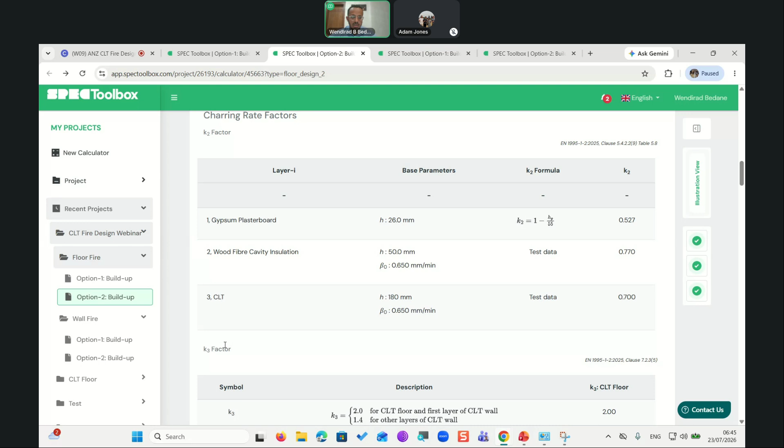So let's see what are the reports on the charring calculation. We will report the charring rate factors, so the factors that we need to use for each layer on the build-up, even including the CLT member itself. So the gypsum plasterboard, the wood fiber insulation, the CLT, all basic or the basis parameters will be presented here.

Then comes the K3 factor. This factor is for the CLT. So since this time it's a floor, we will use a K3 factor of 2.0 that accounts for the post-protected charring. Then comes the gap factor. This factor defines the joint dimension that we have. So this factor is now set to 1 as per the code.

And we will see the charring rates, the initial charring rate and the notional charring rate for initially protected, and the glue line integrity is not maintained. So the basic charring rate and individual phases are calculated here.

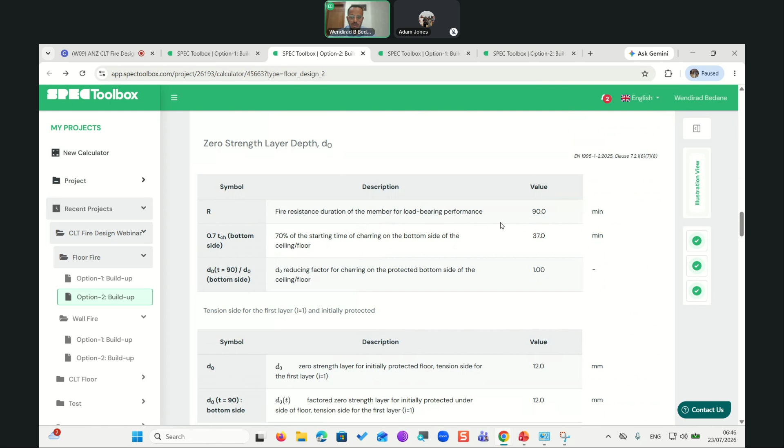Then comes the zero strength layer depth calculation. So for the floor, using the tabular data from the latest Eurocode, we can calculate the individual cases for the zero strength layers, for the tension side and the compression side.

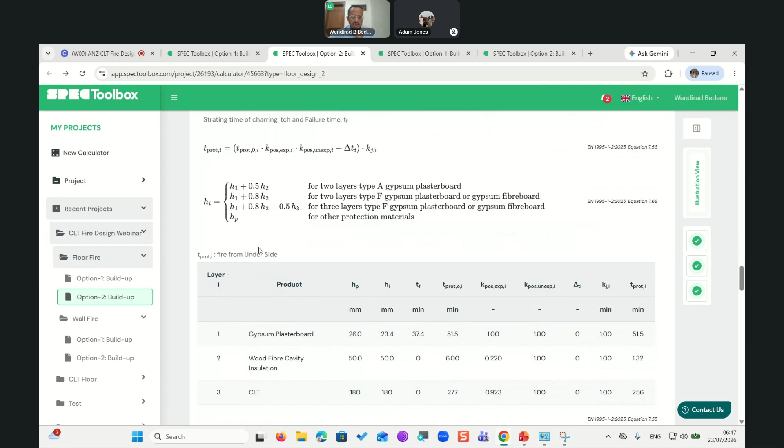The other is the protection time. So as we have discussed earlier, the starting time of charring, the failure time of the protection, and the individual protection time need to be calculated in detail. So this is how we calculate individual layer protection, including the CLT and the protection system. We include the CLT when we study the insulation, but for the starting time and the failure time of the protection, we only consider the layer prior to the CLT member.

So here is how we calculate the insulation time. Everything is presented in detail, and we will see the utilization for the insulation. So it's below 100%. So we are safe. And these are the protection failure times.

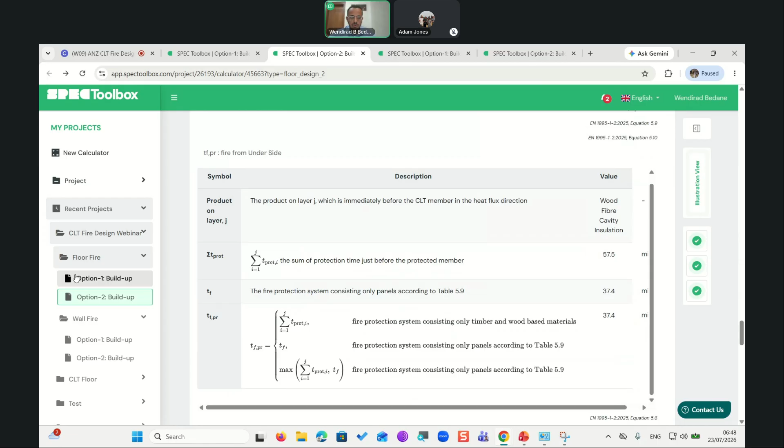So this is calculated using the latest Eurocode, and also the starting time of charring is also presented here. This time, both the starting time and the failure protection time are equal. And also the consolidation time is also calculated here for the bottom side.

And finally, we will present the final design thickness. This design thickness is calculated using the simplified design method. So these are how we present individual calculation: this is the thickness of individual layer before fire, the charred thickness, the zero strength layer, and the final effective charred depth. And finally, we're going to have the unburned thickness post-fire.

This is for the tension on the top side, and when the top side is in compression. So this will be the detailed report.

On the other tabs, we will see the panel property calculation using the selected analytical method. This time it's a gamma method. We'll see all detailed calculation, the effective stiffness and the static moment calculations for bending and the shear strength calculation.

Then comes the loading calculation. Here it follows the load combination rule of the selected loading code, and the analysis section. Here we will see the detailed analysis result for the selected load combination.

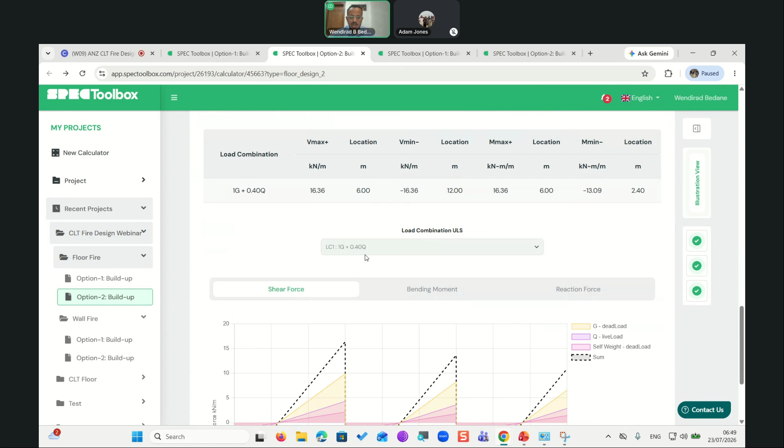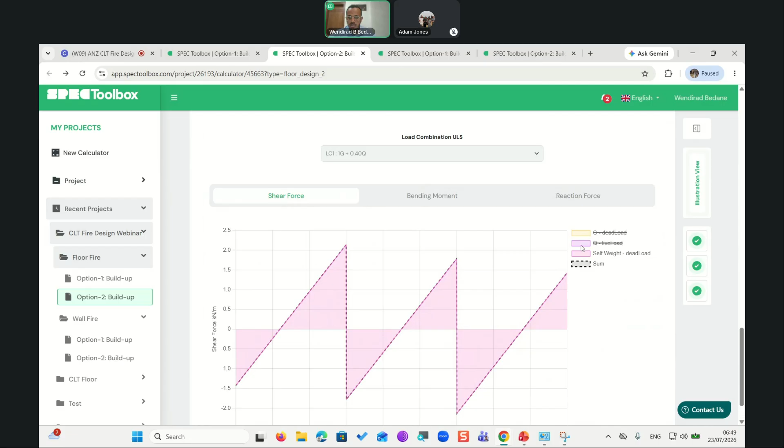This one is the shear force, bending moment, and the reaction force for our span. You can even see selectively for a specific load case—so if you like to see only the self weight, you can hide the rest of the load cases. Every data is presented on the analysis section.

Finally, we'll go to the design section. Here we see the bending design as per the Australian standard, so the design utilization or efficiency is around 40%, so our design passes. The same is for shear design—we will verify the shear capacity using the latest Australian code, and it's around 24%.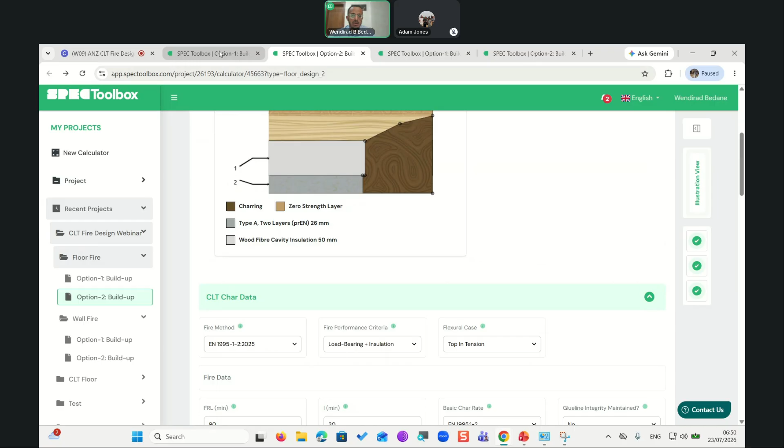So both the bending and shear verification are satisfied, and the integrity, the insulation requirement for the fire performance is also satisfied. This is how we detailed calculate for the floor system. You can save your calculator and have a printout right here.

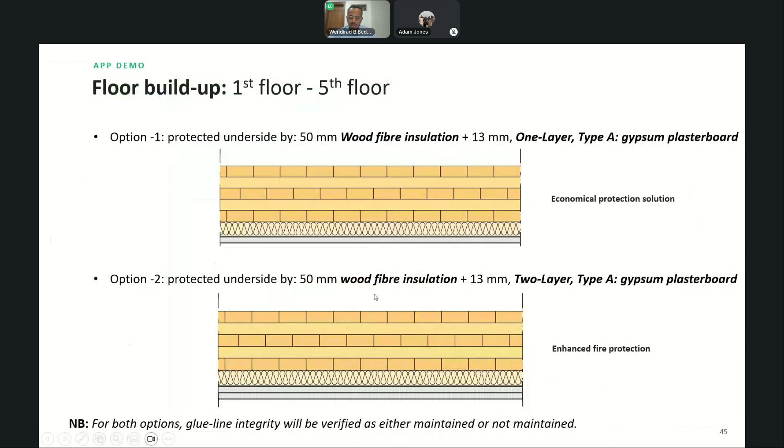Now let us see the wall section. Before that, we can see from our detailed calculation that option one will not provide the required performance for insulation. That's why we skipped it for now, and we take option two build up for our floor from first floor to fifth floor when fire is exposed from the underside.

These are the typical data that are extracted from the SPEC Toolbox calculator. From this, we can see that the charring depth is calculated, the residual section is also verified, zero strength layer is included in detail, and the bond line integrity is also mentioned.

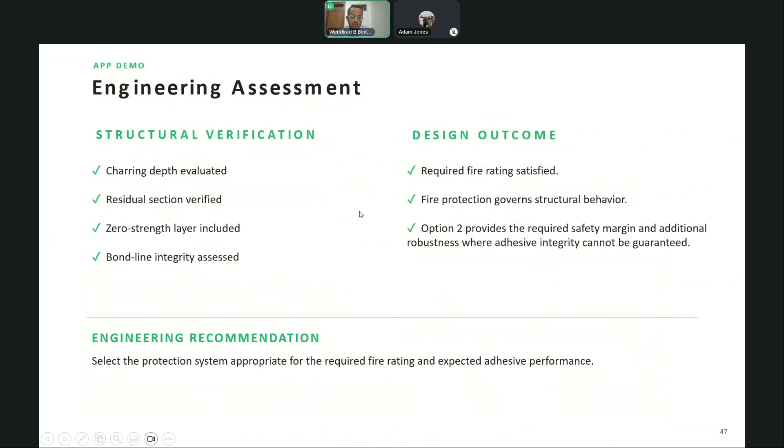The design output shows us the required fire rating is satisfied, the fire protection governs our structural behavior, and option two provides the detailed performance for strength and insulation. So we stick with option 2 for our system.

Now we will go to the wall along axis D for the wall fire design. This will take a load from the upper floor and also from the floor that it's going to support. It's located along axis D, and we do a load take-down here.

The reaction from the floor analysis is presented here along axis D. We sum up for the above five floors and the four-story walls. This is the total superimposed dead load, and the live load is 36 kilonewton per meter, calculated using the following formula.

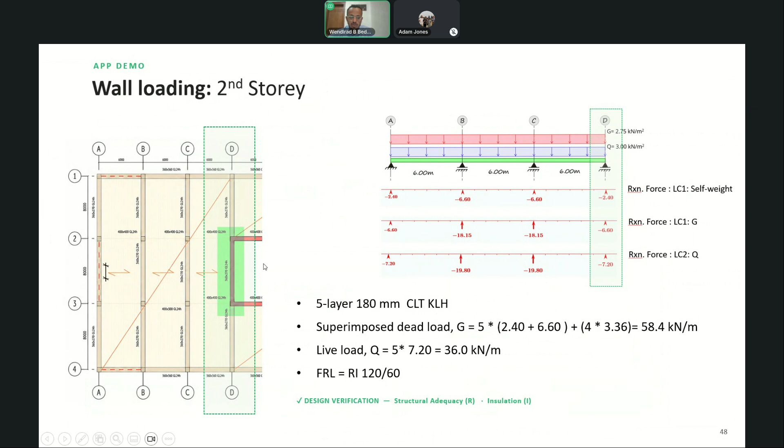This is unfactored load. In the fire, this time the fire requirement is 120 minutes. As you can see here, we are required to have fire from the left side because the right side is the lift shaft, so we don't expect that to be the fire side, and we aim to protect the inside of the lift shaft so it is not exposed to fire and is fully insulated.

For the wall build-up, we will have two options. The one on the left side is the more economical protection, where we only have one layer of gypsum plasterboard with 13 millimeter thickness along with wood fiber insulation. But for the second build-up, we have two layers of gypsum of 13 millimeter thickness and a wood fiber insulation in between the CLT panel.

Let's go to the app and see how the wall fire is calculated. We start with the ambient section in the structural tab. We'll define all the necessary material definitions, the CLT supplier, the layup—this I have already stated initially, so we can see what is inputted here. The design methodology is set to Australian standard, with the design code data.

What is new on the wall is we define the eccentricity of the load from above. This time I set this value to 100 for the ambient case. For the loading data, we'll have dead load and live load. We'll set the load combination here, and the factors are also presented here.

The self weight of the wall is also calculated by the tool. Finally, we'll define our calculated line load on the wall, which is 58.4 kilonewton per meter of superimposed dead load and 36 kilonewton per meter live load. The self weight of this specific story will be calculated by the app.

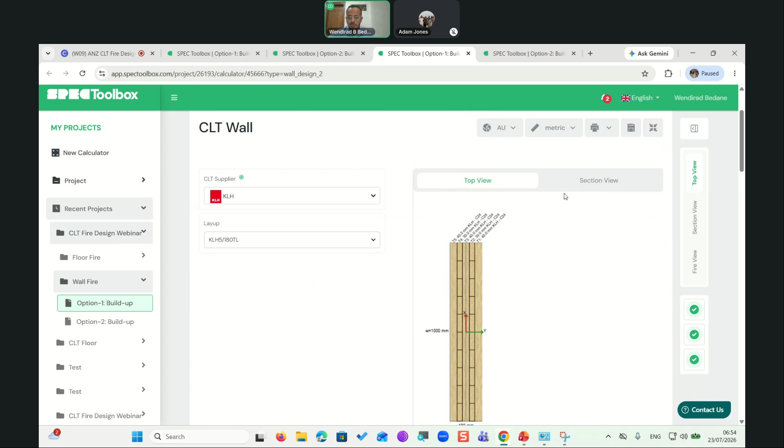You can see on a dynamic plot here—this is the top view and this is the section view—all the data that's defined for the wall. Now you can also verify all output summary for the ambient section.

Here we check the compression, the bending, and the combined effects. So all requirements are satisfied for the ambient section. So we simply move to the fire section or the fire tab for the calculation.

Here we'll define the eccentricity data for the fire specifically. This time it's 20 millimeter. We set the fire method as we have done for the floor calculator. We need load bearing and insulation performance check, and then we have the fire resistance to 120 minutes, and the insulation is 60 minutes. It's a more strict time duration as compared to the floor system.

And the basic charring rates and glue line integrity are also the same as we have set for the floor fire calculator. And the fire is coming on the left face.

You can define the fire from the right face or from both faces of the wall, but this time it's from the left side, and you can define the protection for the left face as we did for the floor. So the left side protection includes the wood fiber insulation and the gypsum plasterboard.

Here are the thickness and also the joint type data. If you have a joint for that specific protection, you can define it using this drop down, and the specific joint types are listed here. For the moment, we don't have a joint type for our case.

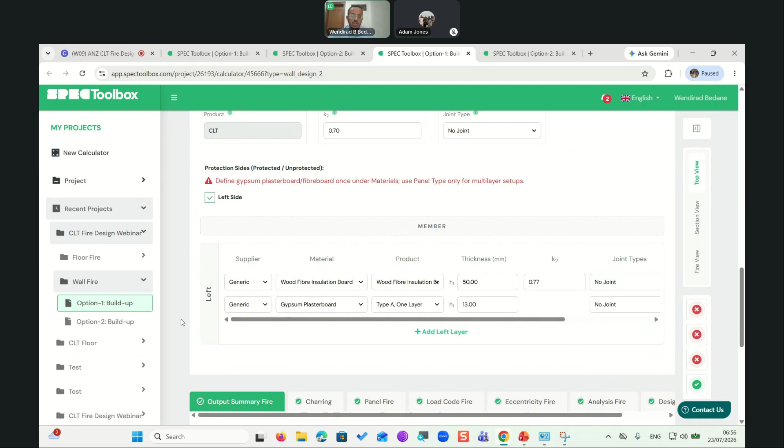As you can see on the first option of the build up, the strength requirement is not satisfied. This is critical. That means the load bearing capacity is compromised, even if the insulation performance is satisfied.

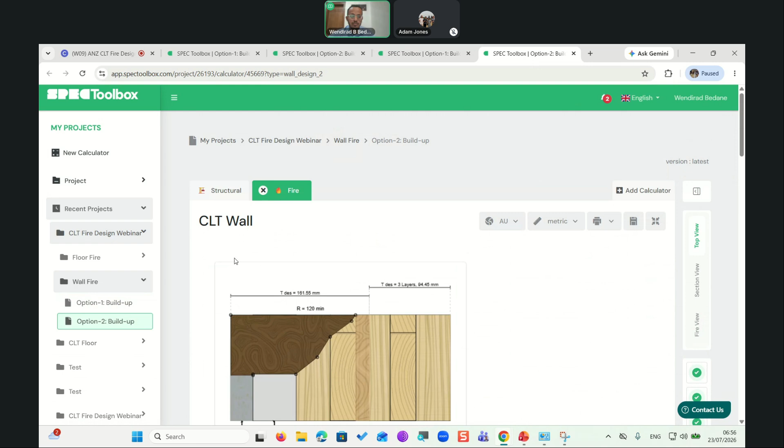So to make sure this checks work, we need to proceed to option 2. Under option 2, what is new is the gypsum layer is now two layers of type A. So every input data is the same, but the gypsum layer is now 2 layers. So for this updated input, our calculation for strength design is working well now.

So the fire compression, the fire bending, and the fire combined effect is working along with the insulation performance requirement.

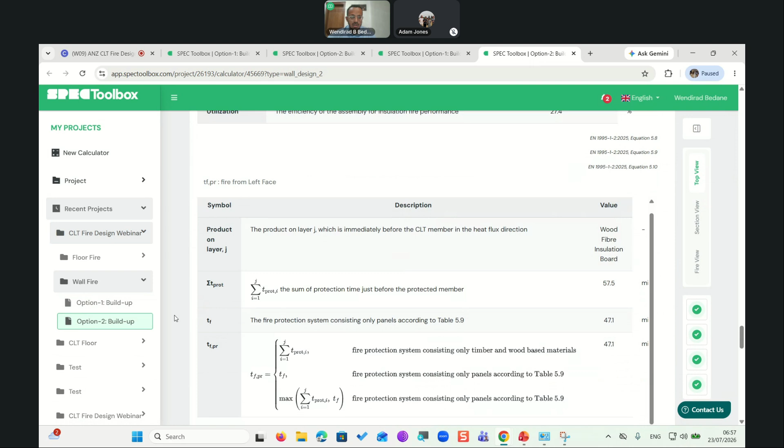On the charring tab, we'll see the detailed data for the charring of the wall panel, including the basis data, the factors for charring rates, the charring rate calculation, the zero strength section, and also the protection time calculation. So we will see the detailed protection time and insulation time calculation and its utilization. And we also have the failure time of the protection and the starting time of the charring.

This shows the detailed calculation. And finally, we're going to have the final design thickness for the wall, and this is presented here, what is left on our section. So with this, we'll proceed to our presentation.

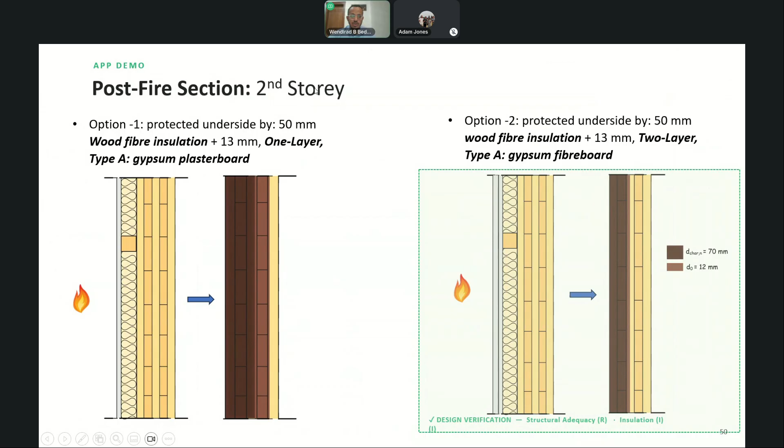So what is left after fire is the following. The dark brown is what is entirely charred, and the light brown is what is deducted as a zero strength layer. So from the two options, we can see that the less deducted section is option 2, and we'll select this for our wall at the specified story, the second story.

So with this, the wall loading is verified on our app. The charring model is applied, residual section calculated, the fire resistance is verified, and the design output shows that the structural adequacy, integrity, and insulation are satisfied.

So from today's presentation, I will consider these 4 things that you need to take with you. The first thing is fire is a process. That's why on our detailed calculation, time matters. So we need to consider this nature of the fire.

Timber chars predictably until it reaches the bond line, where we consider integrity of the bond. The latest Eurocode publishes how it treats the CLT floor and the wall in detail. This is not provided in the current Eurocode.

And finally, integrating or using the SPEC Toolbox, you can use the European char model in order to calculate the remaining char thickness and the design of the member during a fire situation.

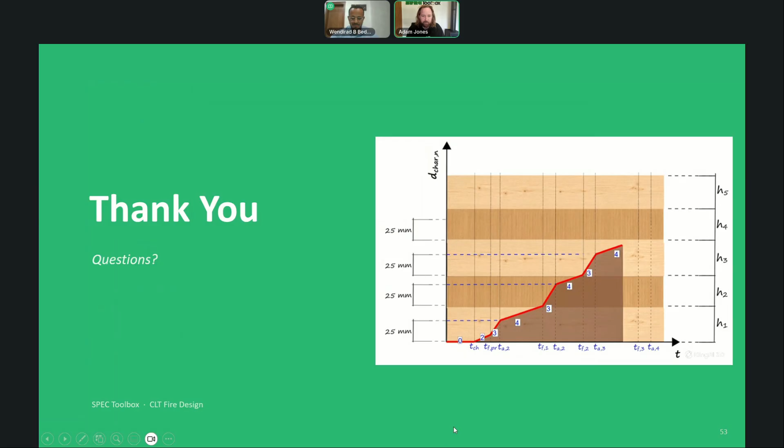Thank you so much, Wendirad, and well done again, and congratulations, because I think everyone watching this webinar can imagine the amount of permutations that the new Eurocode has to get right. And we also have Anto on the call, who's the lead software developer on it. So congrats to our team.

Really appreciate the comments, and you're getting a bit of love in there, Wendirad, from everyone, because you've done a great job basically for everyone in making it easy to design fire at the end of the day.

So just to wrap things up, it's worth mentioning the good news is we've covered structural fire design today. We are going to start doing passive fire systems on SPEC Toolbox. We're working with Imran, who's a bit of a powerhouse in ANZ as well, and we actually got our first passive fire systems provider signed on the app. That's something we're building, similar to streamlining compliance there as well.

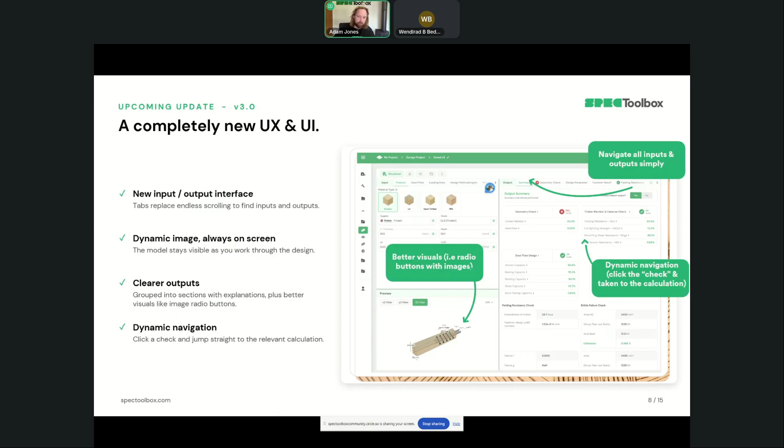Finally, our next webinar is going to be on the 3rd of September. You may have noticed we've done acoustics design in mass timber. The general direction we're heading is to integrate acoustics with fire and structural, so you could actually have a full system design in one place, because that's sometimes where a lot of the complexity goes.